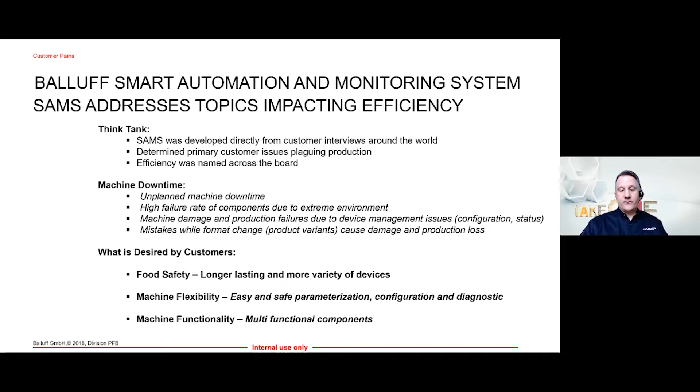And just to make sure, when we're talking about OEE, I like to mention what we're referencing so that we're all on the same page. When we're talking about OEE, we're talking about availability loss, so your stops and slows. We're talking about downtime, unplanned and planned downtime. We're talking about performance loss, which is your stops and slows, or not running at the full speed that the machine, or the line, should be able to run at.

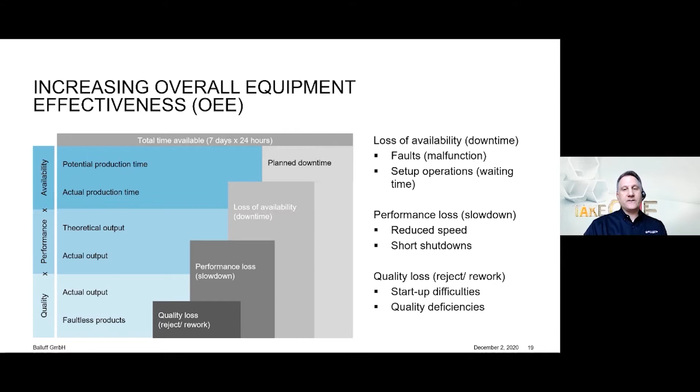And then your quality loss, which is the waste that can happen from when you start the machine up, or when you have defects or errors, or product that you have to kick out because it wasn't produced properly. So when we're talking about OEE, this is what we're talking about. And as we go through the presentation, we'll talk about how the SAMS product and the SAMS family helps directly impact and improve OEE.

So what are we talking about when we talk about a system? What we're talking about is a combination of interrelated and interacting devices or components that form one entity, as a formal definition. From a Balluff point of view, SAMS is a combination of the software and the devices, in this case sensors, that are being used to implement condition monitoring and the advanced IO-Link feature set. And by doing so, it helps eliminate downtime and simplify troubleshooting, changeover, and machine setup. So when we're talking about a system, we're talking about the software in combination with the devices or the sensors.

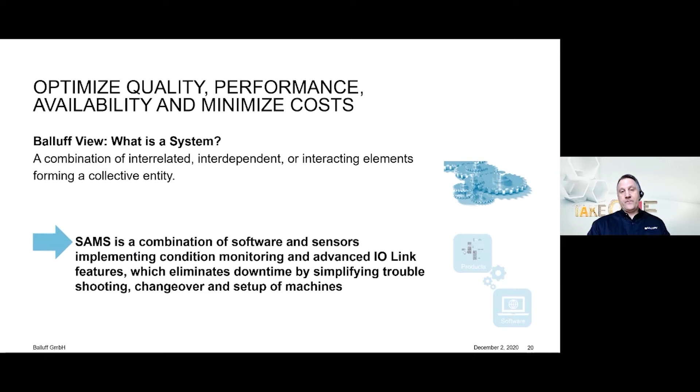And so what are some of the components that make up the system? These devices will start to become available at the end of this month. To start off with, you'll see inductive, photoelectric, and capacitive sensors, along with RFID read and write heads, master blocks and hubs for the controls architecture, and then the software, which we're calling the Balluff Engineering Tool, which is used to help do the configuring and monitoring of the system. As we move forward with our product development and release more devices, pretty much anything and everything that we come out with will have this common look and feel and feature set.

And so the idea here is to really be able to provide all this information and event data that's possibly available directly for helping with your production floor reporting. And so overall, the idea is to help reduce the planned and unplanned downtime, reduce the waste, increase the availability and productivity of the equipment, and also make it more straightforward and take less time to train and learn how to work with and use the devices. And hopefully you'll see why as we continue.

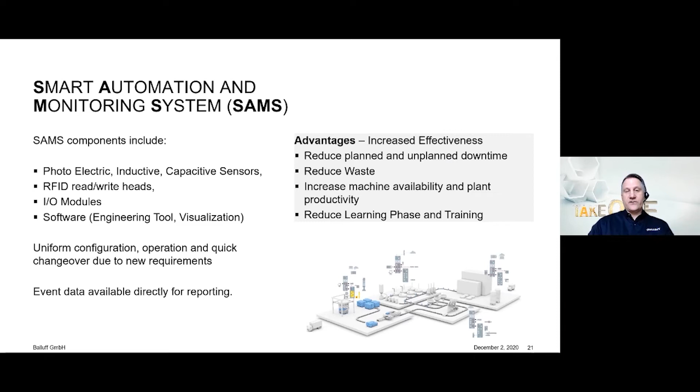So when you look at the SAMS family, there's 5 main areas or key factors that make up the system. The first is what we call our Washdown Plus promise, which is an enhanced IP69K housing, which I'll explain in a minute. When we look at food safety, we're talking about being able to provide more hygienic options for the market. The third area is having a common look and feel, so we'll be talking about configuration there. And then having smart features or the health of the device, so condition monitoring, and then device status. And I'll go into each of these in a little more detail.

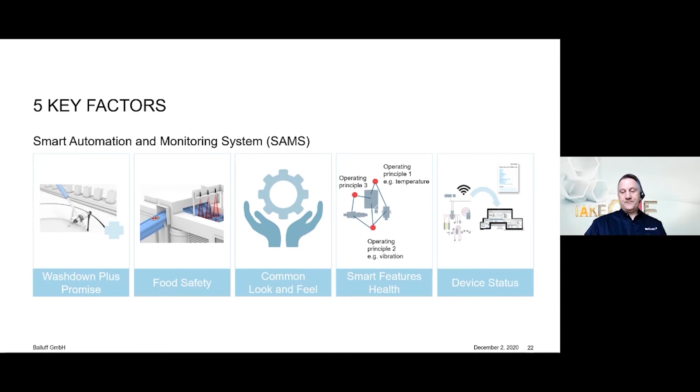So the first challenge or key area that I'd like to discuss is the harsh cleaning environment or process. And so I think everybody that has this type of an environment is very familiar with the potential for the high failure rate of components and unexpected failure and the cost of that to do the replacement, not only for replacing the device, but also the cost of the downtime.

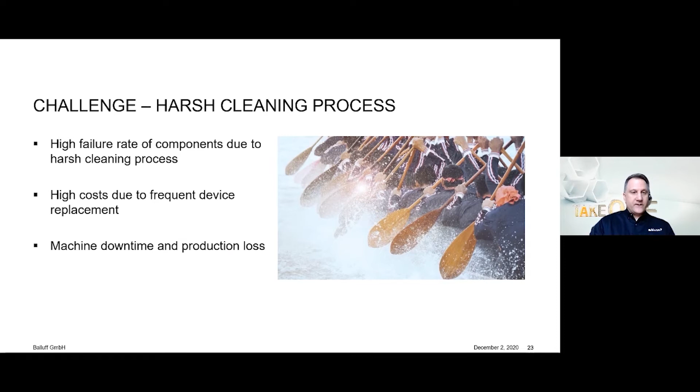And so the way that we're going to help address this as part of the SAMS family is with our Washdown Plus promise. And what that means is we went and identified what the worst case cleaning procedures were based on temperature, time, pressure, cleaning products used, and so forth, and said, hey, that's the benchmark. And then what's the most number of times that a facility would do that cleaning process? And it could be as many as 3 times a day. And so we said, that's our benchmark.

We took the existing IP69K rating as the base and then added all of these other factors that I just described, and then came up with what we call the Washdown Plus. So it's this enhanced IP69K rating. And what does that mean? It means that the device is designed and guaranteed to withstand a minimum of 1,000 wash cycles. And so if your cleaning cycle is 3 times a day, the device is designed to last a year. If it's once a day, it's designed to last 3 years at a minimum.

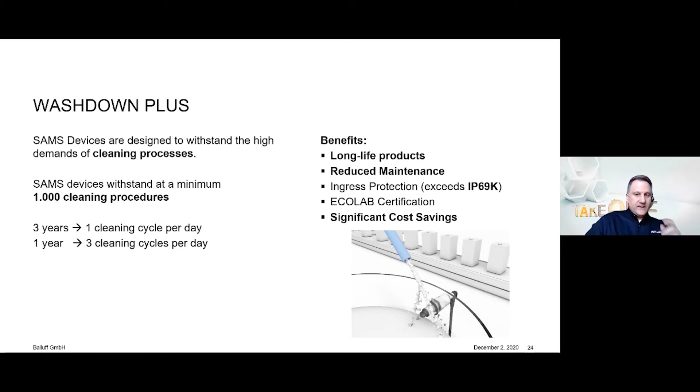So now addressing being able to last longer. And then you'll see also, as we talk about the feature set, being able to identify or predict when or before the device would fail so you can replace it on your time, not when it decides to fail on its own.

So the next challenge that I'd like to talk about, or key factor, is the situation of having an inconsistent look and feel. And what I mean by that is every device having a different way that it's configured, or every device having different mapping or addressing back to the PLC, or different parameters and functionality, even within the same vendor of sensors. And also the need for flexibility of equipment with regards to format change and being able to run smaller batch sizes. So coming back to what I talked about earlier, changeover or format change.

And so being able to make that more consistent and have that look and feel the same for those aspects of production. And what are we talking about? Well, what we're talking about is having a consistent and a common form factor for the housing and connectors of all these SAMS devices. So now you're not having to deal with a different form factor for every device. But more importantly, what I think is really interesting is having this consistent and common configuration.

So if you understand or learn how to configure a proximity sensor, the way that that's configured and then addressed back at the PLC, and what parameters are available on that device will be the same for a proximity sensor, for a photoelectric, for a capacitive, for all of the devices. And then in addition to that, being able to have this common look and feel with regards to changeover, and being able to more easily and efficiently do changeover because of being able to send configuration changes.

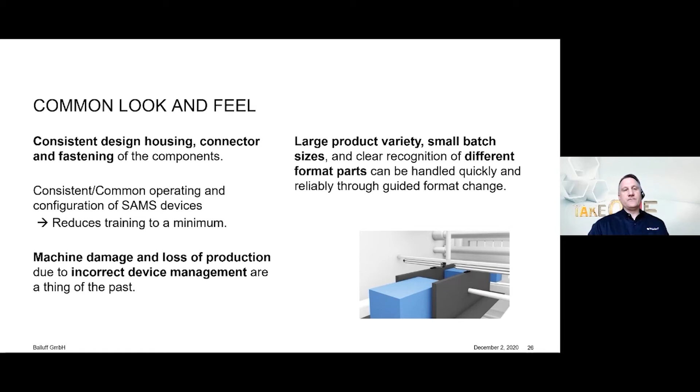And also I'll be showing or unveiling here a new device specifically for changeover, which is the digital position indicator. And so what we're talking about with this device, the digital position indicator, is an IP69K housing and a device that will go right in line with the shaft of a hand crank, and all of these devices are IO-Link.

They all, like I said, have the same condition monitoring parameters and advanced functionality. In particular, the primary sensing function of this device is being able to sense or determine the position of that hand crank or that shaft.

What we have here is an LED display, and you can see that there's two numbers. So you'll have the position that you're in displayed, and then when the configuration change comes from the PLC through the IO-Link controls architecture, it'll show what position we need to go to.

And you see these green lines around the outside. Those are actually LEDs around the edge of the face, and they will rotate in the direction that the operator needs to turn the hand crank, and then indicate to them when they've achieved the new position.

So being able to do guided format change quickly and easily, having consistent and accurate changeover every time, and being able to reduce that time, all plays into the common look and feel and helping to reduce the planned downtime of changeover.

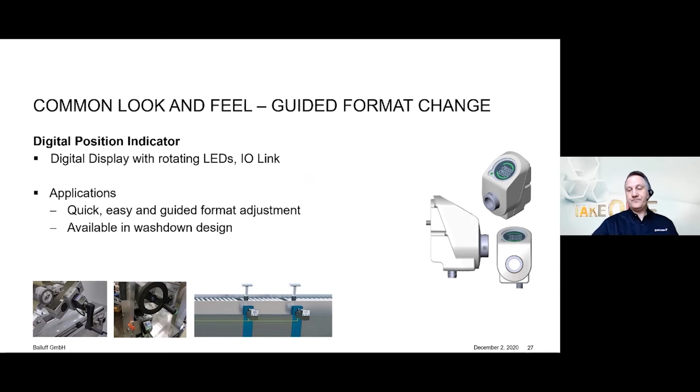The next area that I'd like to talk about is what we call missing machine data. So, not being able to provide or have these functionalities that you need, it takes longer to troubleshoot. What was the status of the machine, or what was the condition monitoring? Is it about ready to fail, or is there a change in the environment somehow that could be causing a problem in that area to go look at?

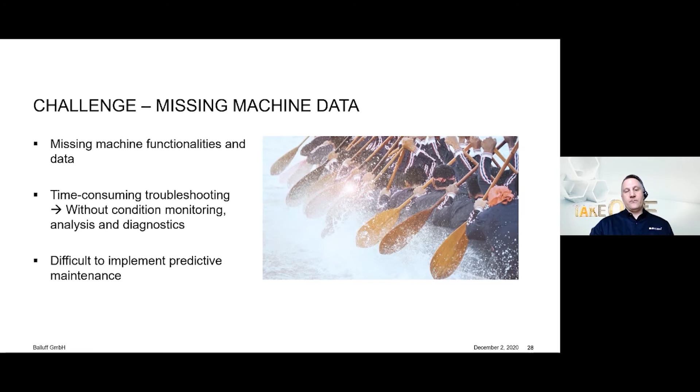And so by being able to have more functionality from the device, more data from the device, being able to really implement condition monitoring consistently throughout the entire system, now we're able to help reduce the troubleshooting time and really implement predictive maintenance. And so what are we talking about?

We're talking about the health of the device and the health of the machine, and being able to do that in a couple different ways, starting with having condition monitoring functionality or parameters in each device, such as temperature, vibration, inclination, humidity, signal quality. All of these condition monitoring parameters will be available in all the devices, and are all, like I said, configured, addressed, etc., the same.

And so now you have the primary sensing function of the device, which could be object detection or proximity or position, and you have these condition monitoring values as a secondary function. And so now you really have data sources of the performance of the machine through these devices.

Also, when we're talking about this, we're talking about additional functionality. So there's a ping function in every device, just like when your computer is on a network, and it helps to identify irregularities in communication, or where is the device, is it communicating, and being able to have that reported.

And then having additional smart features such as operating hours at the port level on a master block or a hub, integrated counting, boot cycle, and logic built into the device, which I'll talk about in a second. All of this adding up to helping reduce the cost and time of troubleshooting, and again, really being able to implement predictive maintenance.

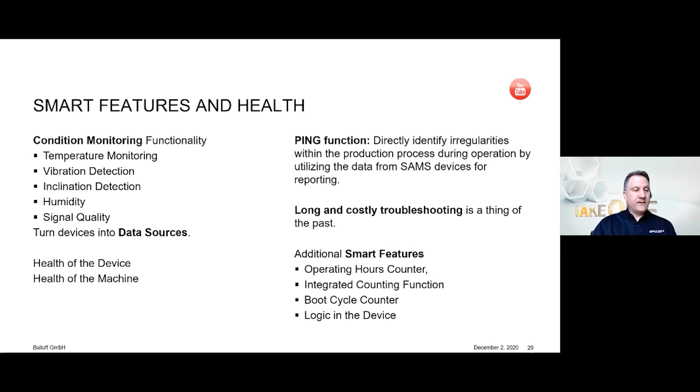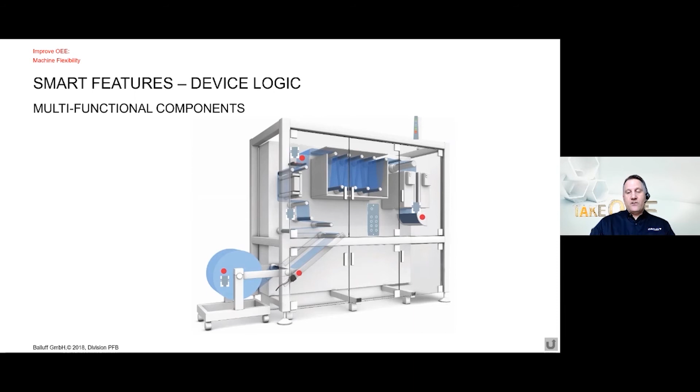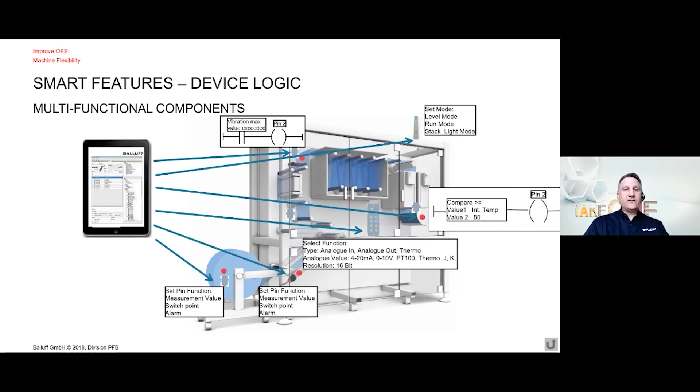So when I'm talking about logic in the device, this example is of a vertical form, fill, and seal machine. You see all the red dots here are representing a sensor that's already doing a primary sensing function. But now, being able to configure the device with different logic, such as if the vibration exceeds a certain value, now you can fire pin 2 of the device and send that diagnostic information or event data to the PLC,

or you can send your event or diagnostic information to your SCADA system or whatever it might be, and you can configure the devices through the engineering tool or the software tool without having to put the logic in the PLC. So you're literally checking a box and setting a threshold when you set up the device, and now you're able to put that functionality at the device on the machine and get this information without having to write that extra code.

And you can change this on the fly. So if you decide, hey, I want to change the temperature level or the vibration or whatever it is, you can make that adjustment automatically.

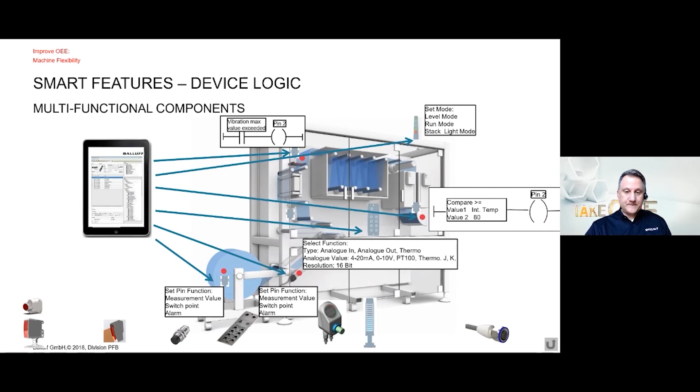So earlier I mentioned health of the device and health of the machine. So the SAMS devices that have condition monitoring built into them, along with their primary sensing function, that condition monitoring is, we're talking about the health of the device.

So you can, with this device, monitor vibration, temperature, humidity, or pressure. And it can be done in a continuous monitoring, and you're able to determine long-term trends and set thresholds with the tolerances that you feel are appropriate for your production area. So really neat device, really very straightforward to implement and very cost effective.

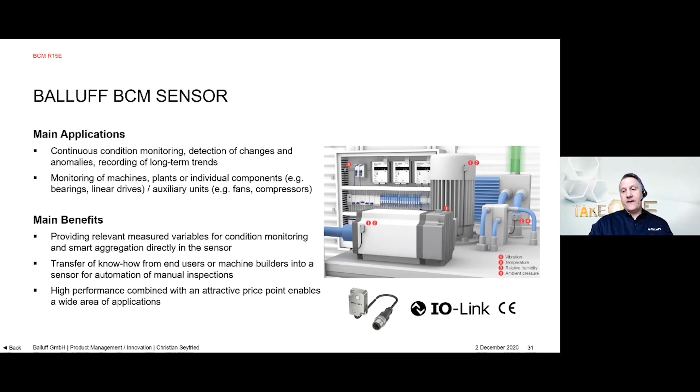So the last area that I'd like to talk about, the key factor to the SAMS family, is what we call machinery and plant health, or the device status. So being able to have a common look and feel and common status indication of each device across the plant to make it easier to monitor, easier to troubleshoot, easier to replace.

So each device not only will have that same status that you can monitor through the engineering tool or the software, but at the device, there's a single multicolor LED that will flash or have a steady state that represents the same status for every device. So your power, a failure, your maintenance, whatever that status might be, it's the same color indication for all the devices.

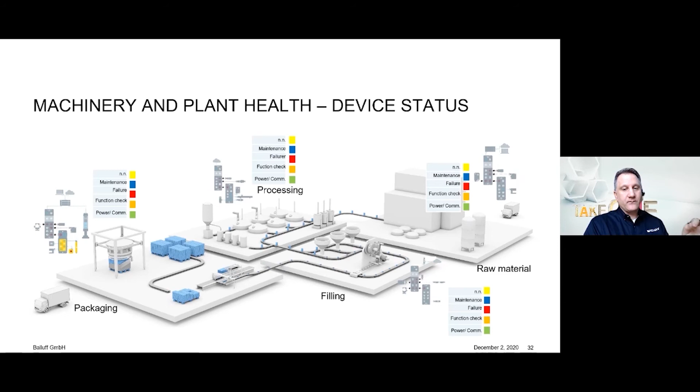And so what that means is being able to have a uniform understanding of messaging and indication everywhere instantly, along with the condition monitoring like I talked about. So really being able to have comprehensive diagnostics that you can visualize, be able to take that information, incorporate it into dashboards or your SCADA system directly, and now really having diagnostic information to be able to put together accurate and meaningful reports and trends for your production facility. And again, really being able to fully implement predictive maintenance.

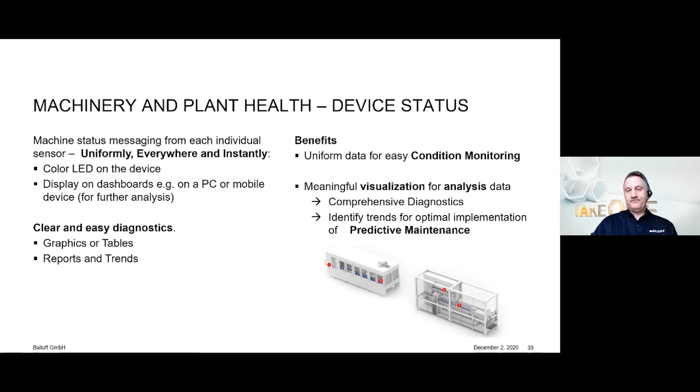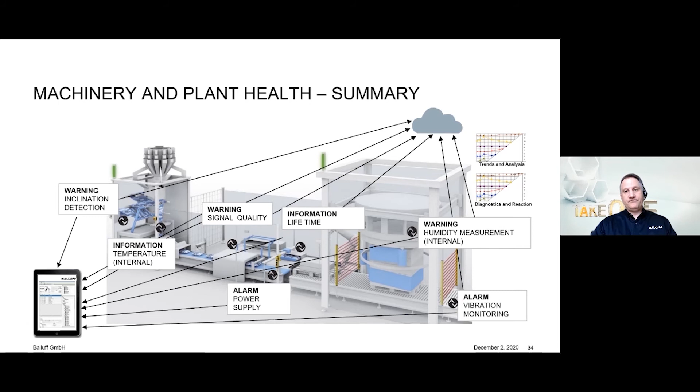And so, hopefully I was able to show today smart factory, smart machine concepts that are available today with the smart automation and monitoring system, or SAMS, and IO-Link, and these concepts that we're talking about that are enabled and available today, such as condition monitoring, more accurate data, enhanced diagnostics, making it simple and straightforward to retrofit, having that logic in the device, and really being able to fully implement predictive maintenance and guided format change.